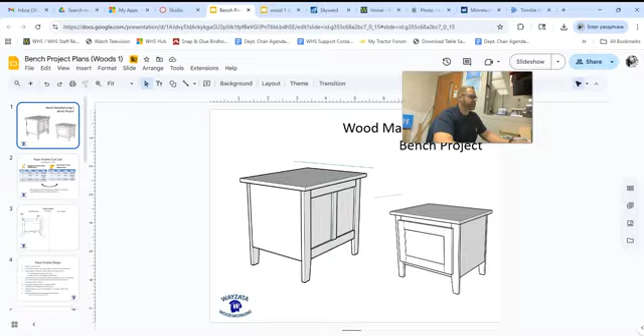Today we're going to look at drawing our bench plans on SketchUp. Later on, we'll move those plans into VCarve to program the case parts to get cut out on the CNC router. If you want to, you can have this plan open. This plan is where we're going to get all of our sizes, and when we're looking at this project, we're not actually going to cut the whole project out on the CNC router. We're actually just going to cut the case parts out.

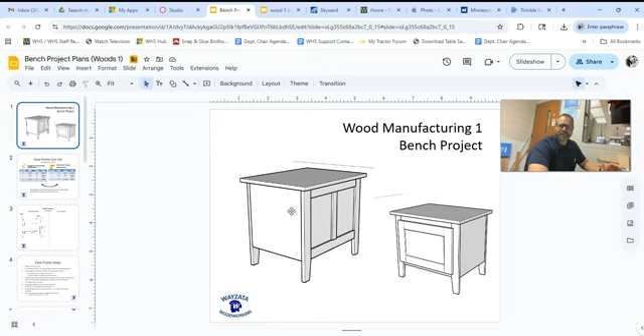So that's my sides, my bottom. Those are the only three parts that are going to get cut out. So don't stress out too much about this. The rest of it is all going to get done in the traditional manner. We can skip through these first few pages, and we're going right here to the case cut list.

If I look at the exploded view, I can see that my top and my bottom have rabbets, dados, and a bottom shelf. Those are the pieces that are going to get cut out of sheet stock. The rest is all going to be solid wood that we'll use the table saw, miter saw, all of those things for. So my first step is going to be to go to

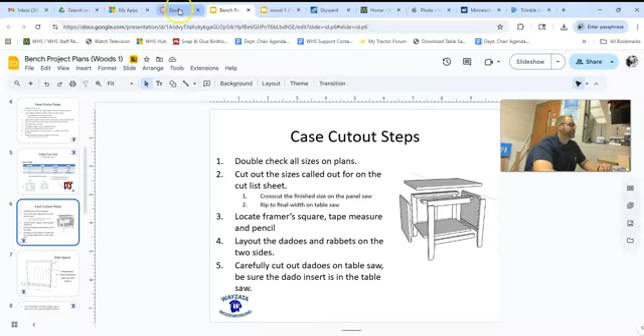app.sketchup.com. And if you're on our Canvas page, you'll find a link that says login to SketchUp here. So don't stress too much about it. I'll even go to the dashboard for Woods 1. And if you're not in Woods 1, there'll be something very similar here. But it'll say click here to log into SketchUp. And when we click there, it'll bring us to this page that I was just on. You're going to want to sign in with Google, use your school credentials.

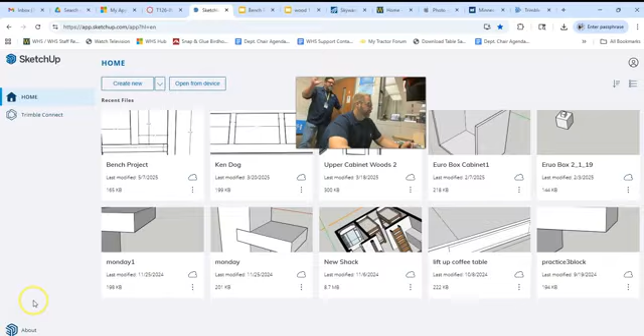And when you first log into this, let's accept these. I'm going to skip the passkey for now. You're going to see any drawings that you've ever done in SketchUp. Now, a lot of you probably don't have any. I'll probably have several that pop up here in the next few minutes. But we will have quite a few drawings, and I'm going to pull up my bench project. So this is going to be a completed drawing.

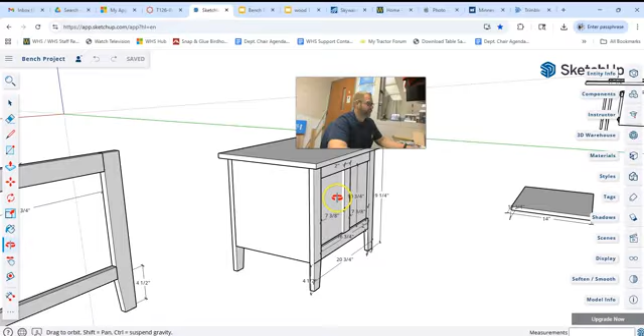So here is the project that we are going to be building for most of our time in Woods 1 together. Now, I'm not going to expect you to draw this whole project in SketchUp. This is just what I had to draw so that I could make the packet that you guys are looking at to get all the sizes. So don't let this intimidate you. We're actually going to take this apart and just draw it piece by piece. Like we said earlier, you're actually only going to draw this piece right here, this piece right here, and then the bottom shelf. So don't stress about it.

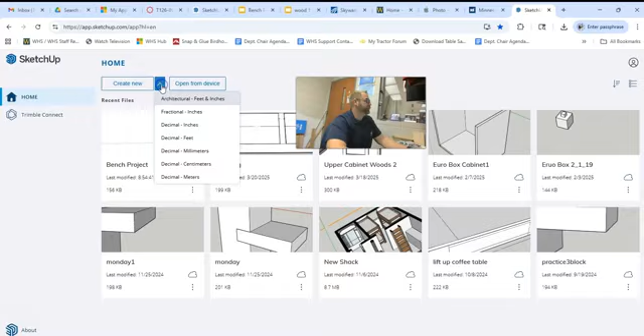I am going to come all the way over here to start a new drawing. When I started this, we want to make sure that we choose the right template, and we want to choose the fractional template that is just inches. We'll go back and take a look at that in a little bit. In fact, I'll even start over fresh here so you can see that template. We'll just let her load here. So we're going to come up here, say create new, and we want to do fractional inches.

Now, a lot of people think this is me. This is actually not me that shows up on SketchUp. But we're going to leave that guy in place right now because he gives us a little bit of scale. I've had students draw this before, and it doesn't compute on the CNC router because while it looks proportional, it'll be 2,000 feet tall and 800 feet wide, and it won't be able to get cut out.

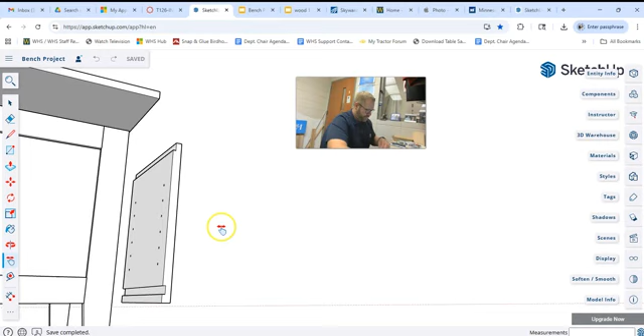So we're going to start with the side of our project, and I'll toggle back and forth between these two so we can kind of reference what it is that we're going to be building. But we're going to start with this side right here. And if you look in your packet, you can see that the side is 14 inches wide by 14 and 3/4 tall. All of our material is going to be 3/4 inch thick material. So I am going to start drawing right here.

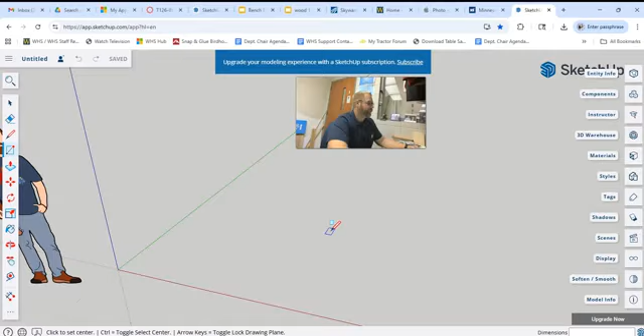And if I have a mouse, I can use that scroll wheel to zoom in and out. Sometimes that scroll wheel will orbit you around the project. If that's happening, hold down the control button on the keyboard and you can zoom in and out. So SketchUp is very simple to draw. I'm going to click one time to start my rectangle, and then I'm going to click again to place my rectangle. Now, I don't even have to try to make it the right size because I'll adjust that. I'm going to click now to place my rectangle, and I don't want to move the mouse.

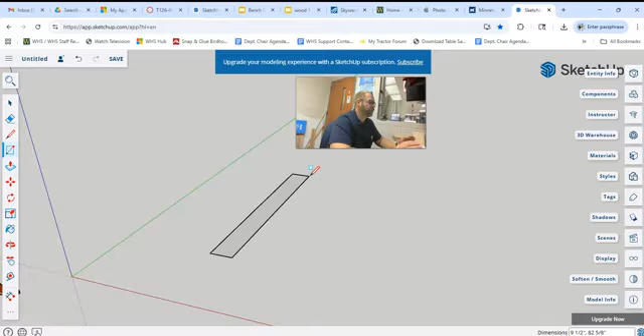The only thing I want to do is go to the keyboard now. I don't have to hit delete. I just have to type the dimensions I want. And I want 0.75. That's my thickness. And then I want the depth of this board, which is 14.75, and hit enter.

Now, if you accidentally flipped those dimensions around, you can do it again. So if I need to put in the 14.75 and 0.75, if I start typing again, 14.75, you can see in the bottom right corner, I'm still in that window, and that'll flip it that way. But I don't want it to be that way. I want it the way that I had it before. So I'm going to go to 0.75, comma, 14.75. All right.

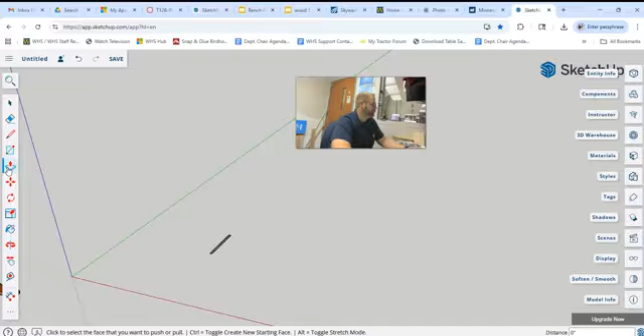Now, as soon as I use my mouse again, as soon as I click anywhere else, those dimensions are locked in. I'm going to come over here to this push-pull tool. It's the rectangle with the arrow sticking out of it, and I'm going to zoom in, and I'm going to hover over that until it turns blue. You see how it's got those dots? It's shaded. Now I'm just going to click, and I want to pull this up to be 14 inches tall.

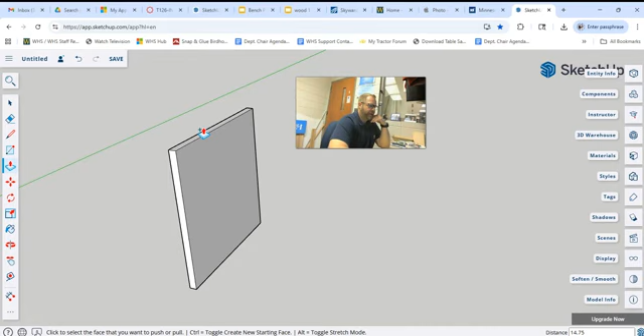Actually, I made a mistake. I want to pull that up to be 14 3/4 of an inch tall at 14.75. And I'll hit enter. And now that thing will be exactly 14.75. And I want to show you where I made this mistake.

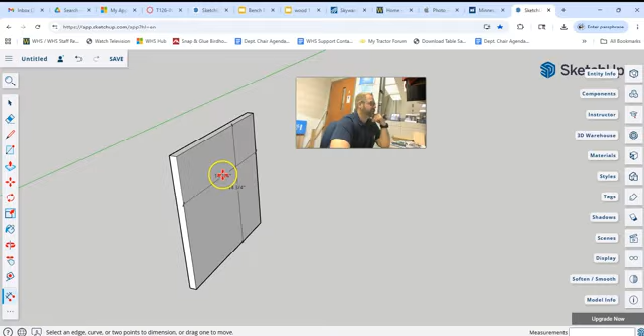So I just grabbed the dimension tools, and if you don't see a tool, you hit these three dots here, more pops up. I'm going to hit this dimension tool. That's 14 3/4. And that's 14 3/4. And that's the problem, because this is only supposed to be 14 inches deep. If I go back to what this is supposed to look like and use that same dimension tool, I can see that's 14 and that's 14 3/4.

It's really easy to fix. I'm going to grab this push-pull tool, hover over this edge, and I'm going to push it in, and I'm going to type in 0.75. Now you see we're at 14 by 14 3/4. And then I'm just going to click on these dimension lines and hit delete, not backspace, hit delete. And this is the start of my side.

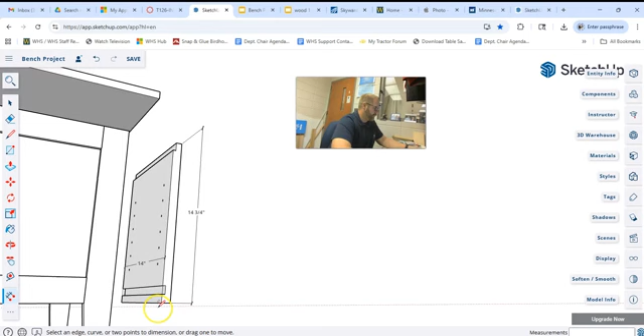Now it's okay if you don't know what all these terms are, but I need to draw this dado in here. And this dado, if I want to zoom in on this, I can see is 3/4 of an inch up from the bottom. It's 3/4 tall, and it's 1/4 of an inch deep. I'll see if I can zoom in enough so you guys can see that. 1/4 of an inch deep. You don't have to try to do all that at one time.

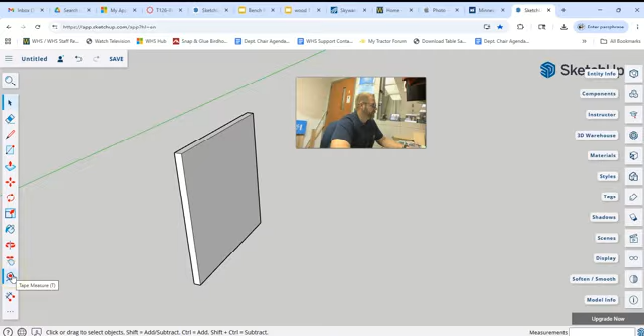So SketchUp's got these wonderful things called guide lines. So I'm going to use the tape measure to make one of these, and I'll click on the tape measure here. Again, if you can't find the tape measure, come to these three dots, find the tape measure. But these draw lines that are just for referencing. It's not a permanent line. So I'm going to click once to start the line, and I'm going to pull it up. I'm going to place it anywhere I want to and type in 0.75.

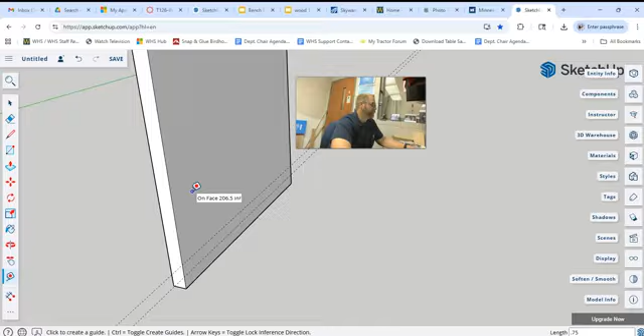Now that just snapped to be 0.75 from the bottom, and I need to go up another 3/4 of an inch. So I click to place it, and if it does this business where it only draws one line, I'll hit escape, click on a different tool, and then come back to it. And it's still being fickle. Sometimes if you hit control, you get the cross on there, and now when you have that cross on there, you can hit 0.75 and it'll go up. There's a few different options with these dimension tools, and hitting control toggles between the different options that we have.

So now I've got these guidelines in. I've got this rectangle. I'm going to click over here, or I can click over here, because I want to draw a rectangle. I want to draw a permanent line. So I'm going to click on the intersection there, click on the intersection there. Now you can see it laid an actual line on my project, and I want to make this a dado.

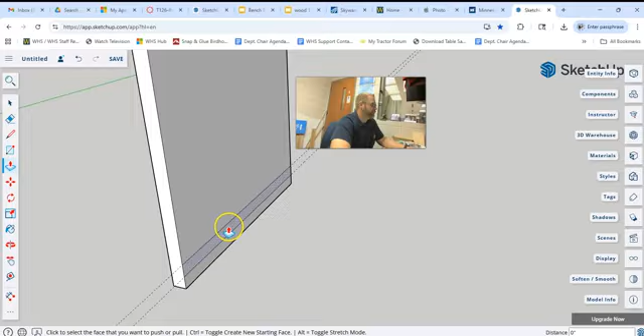So another board is actually going to slide into here at some point, but I'm going to push that in 1/4 of an inch. So now I've got my dado drawn on the bottom, 3/4, 3/4, 1/4 of an inch. Now I'm going to get rid of these guidelines. Don't want them. They're in the way.

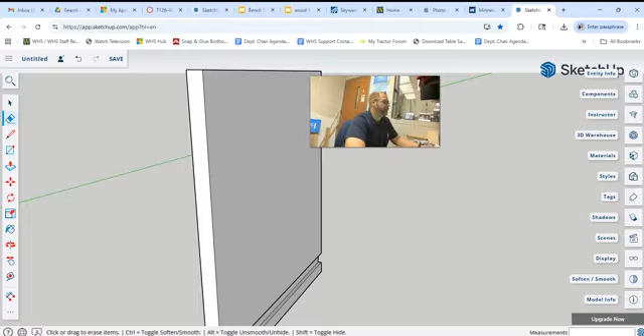I got to do the similar thing up top, except that this dado is actually called a rabbet because this dado is touching the edge of my board. It's okay if you don't know the difference. I'm going to go down 0.75, get my rectangle tool, push this in, 0.25, enter, and I've got my rabbet.

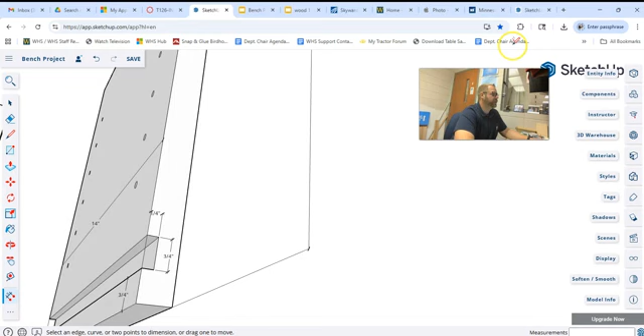On this plan, we've got line bores in here for an adjustable shelf. We're going to skip that. We don't need to have an adjustable shelf in here. I don't think it's big enough to need that. So now this piece is done. It's locked in, and I don't want to accidentally change any size because it's the size I need it to be.

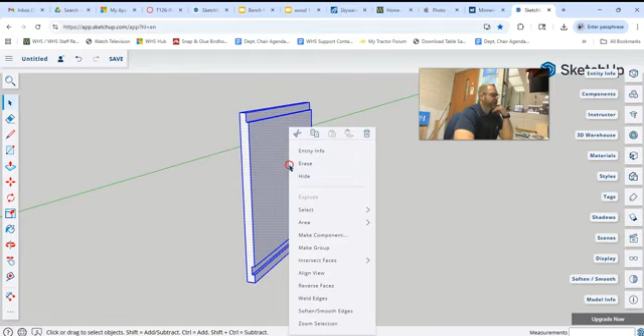So now what I'm going to do is I'm going to triple click this, or I can draw a box around it so it's all selected, and I'm going to right click on it and say make a component. And I'm going to call it bench. Oops.

Bench side, and hit create. Now if I come over here and grab a tool, I get the little X saying I can't do anything to it. That's perfect. We want that thing to be locked in and not move.

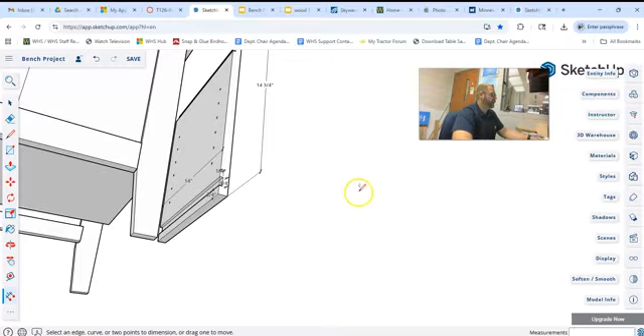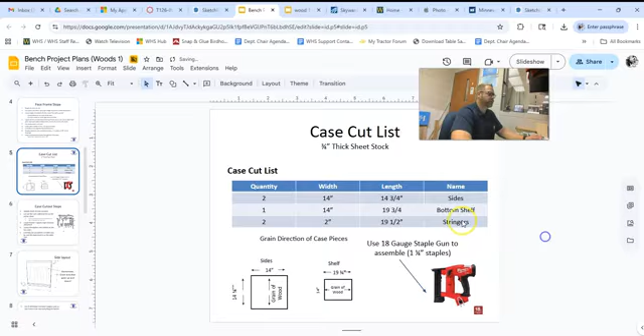Now, if I go back to what I want to do next, I need to draw my bottom. If I go back to my plans here, I can see that my bottom is the same width but it is 19 3/4. So it's called shelf. We can call it bottom shelf if we want to. 14 by 19 3/4.

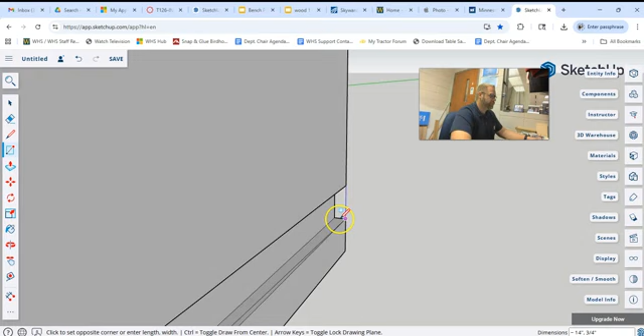So here's the easiest way to do this. When I draw now, it's not going to fuse to this. So I'm actually going to draw another rectangle in here. I'm going to start the rectangle here. And if your rectangle is referencing from the center like that, if I hit Control, it'll reference from the corner, and that's what I want. I'm going to zoom in, and I want to draw the rectangle right inside of that dado.

Whoa, and look at that. I hit Control again, and it made it huge. So I'm going to hit Control Z to undo. Hit Control. Trying to zoom in here. Zoom's being difficult. There we go. So I've got that rectangle sitting on top of here.

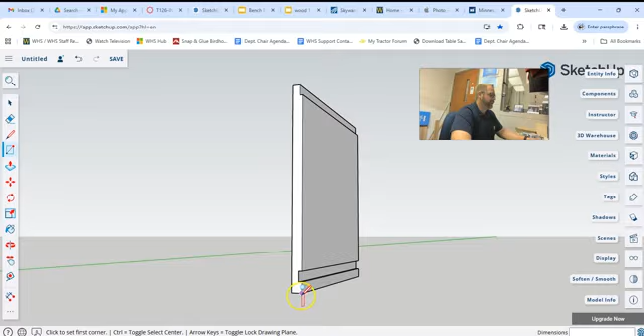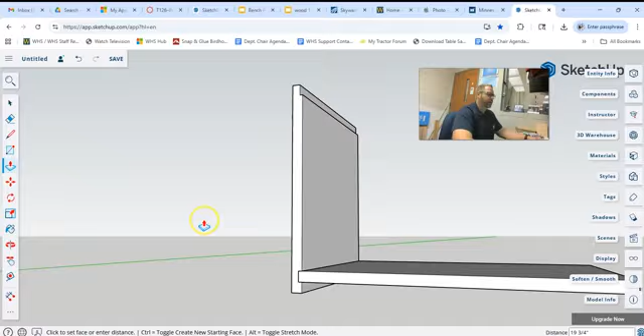And I know it's sitting on top of here because I'm going to pull this out to be the length of my shelf. What was the length of my shelf? 19 3/4. Oops. I pulled it out just a little tiny bit, and I'm going to type in 19.75. And there is my bottom shelf right there at 19.75. So I'll do that again. I've already drawn that rectangle.

If you have a plus on here, I don't know if you can see it, but on my push-pull tool, there's a plus. I'm going to hit Control to cycle off of that option. I pull this out, 19.75, enter. And that's the bottom shelf of my cabinet, which makes sense. That bottom shelf is longer than my side is tall.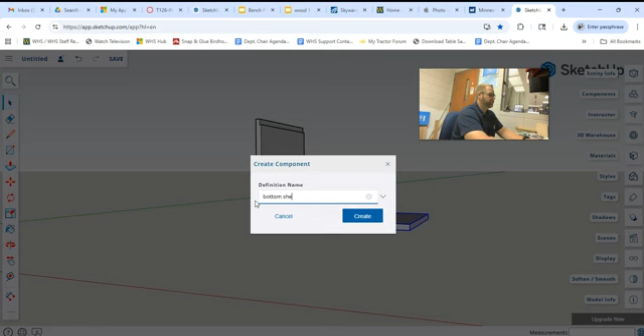Now, I need to lock this in so I don't accidentally change that. So I'm going to make this a component, call it bottom shelf, create. And now I don't want to have to redraw this. I've already done all this work, but I just need a mirror image over here. So I am going to find the flip tool. There's the flip tool. And actually, before I flip it, I need to make another one.

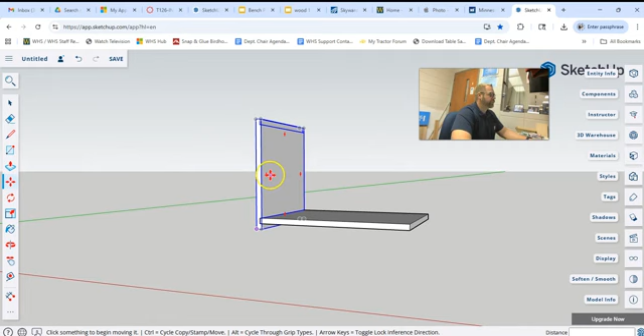So I can come here and find the move tool. If I hover over it, it's called move. If you don't have the move tool there, go to the three dots and find it. Now, if I just grab this and move it right now, it's just going to move the side, and I want to leave the side where it is. So I am going to use one of the options for the move tool by hitting the Control button. Do you see how the plus shows up on the move tool? It's going to make a copy and allow me to move it. It's kind of like a copy paste function.

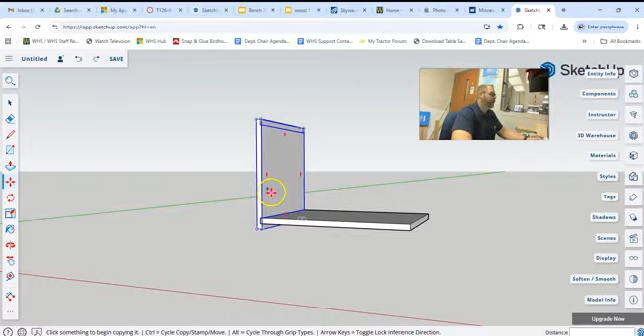Now, when I hover over this and click on it, I make another one. But do we notice it's not facing the right way? So now I'll come back over here and I'm going to grab the flip tool.

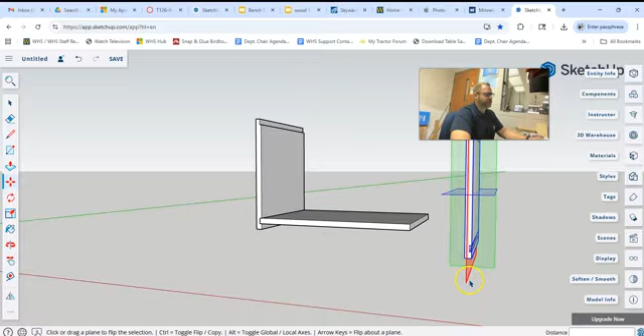Flip. And I'm going to click on there. And now I want to pick the axis I'm going to flip it on. I'm going to pick the red axis. Now we're flipped, and I'm just going to click elsewhere. Now that I've flipped this, I need to move it into place.

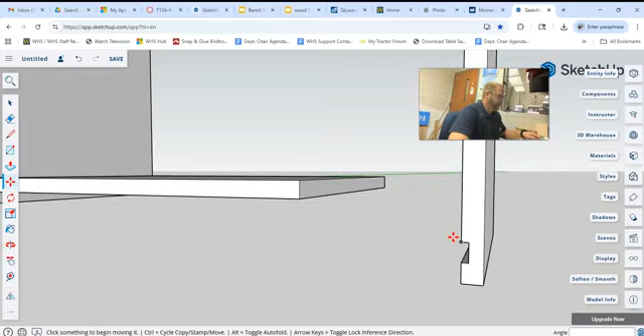So I'm just going to grab the move tool. SketchUp loves corners, so I'm going to zoom in. I'm going to get one of these corners, and notice I hit Control, so I got that plus on there. If I click here, it's going to make another one. I'll hit Control again, and I want just the straight move tool. I go here, and I move it to there.

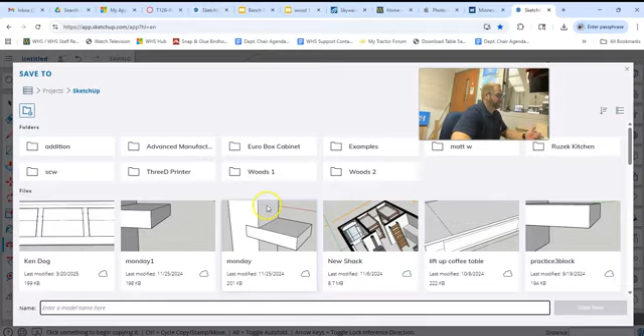So these pieces now, this is all that I want. If I orbit around, this is all that I need to cut out on VCarve, on the CNC router. So what I want to do is come up here and save this. I should have saved it earlier. So I'm going to go to SketchUp, and you'll have none of this. I've got lots of stuff in here because I've used this a lot.

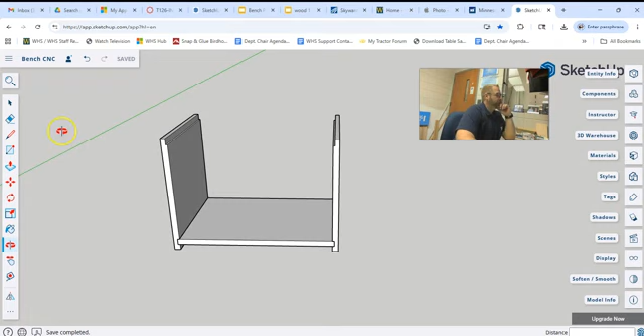I'd make a folder called Woods 1, and I'm going to call this bench CNC, and I'm going to save it. And now I've got my bench CNC. The last thing we've got to do is download this to the computer. So you're going to come up here and say download SKP, and that's going to download this file to your downloads on your computer. And it's that file that we're going to need next when we bring this into VCarve.